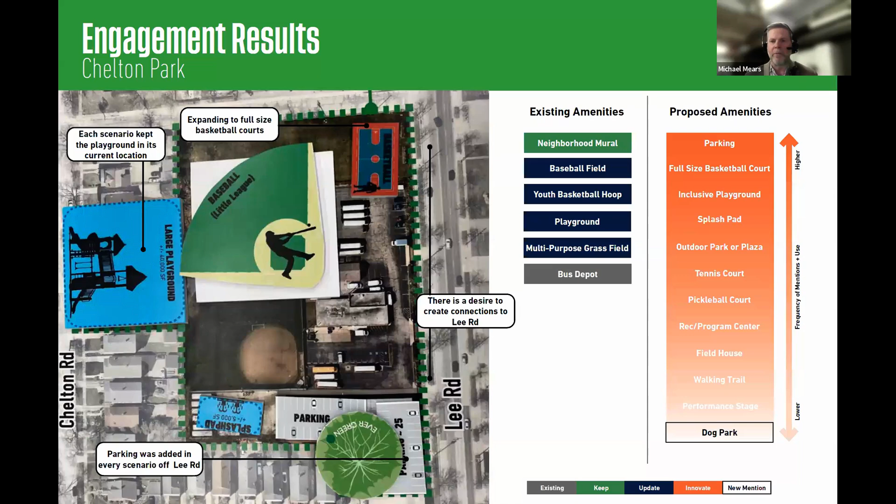Here's a sample of what that looked like for Chelton Park. People looked at maintaining baseball on the site, maybe including a large playground, adding basketball, expanding the parking lot, and things like that. We've taken pictures and documented all these different recommendations to highlight existing amenities people wanted to keep, or proposed amenities people were looking at potentially adding at each site.

For STJ, some of the ideas were converting the existing field to a multi-purpose turf field, maybe keeping the playground or moving the playground, or potentially adding an outdoor program or recreation center on the corner of Lee Road.

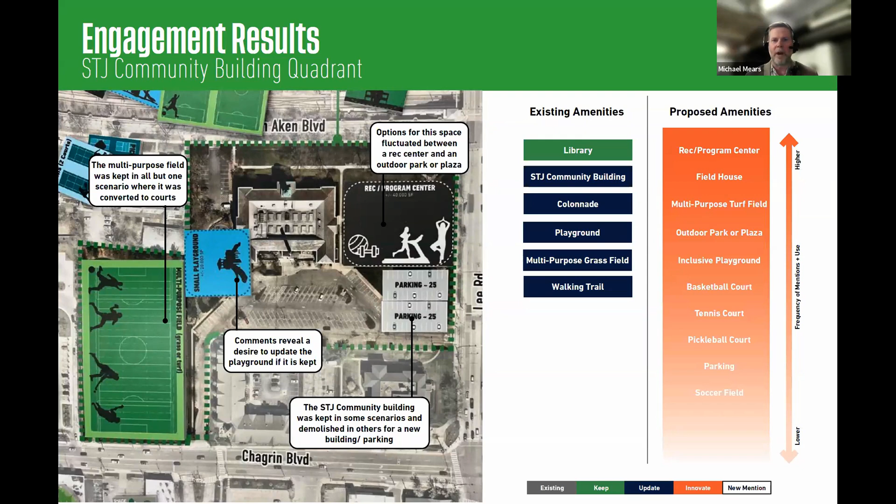So that's what we did throughout the summer as part of our engagement, to build this community vision as we lead to plan creation and start to think about our strategic planning and design concepts for each site. Now I'm going to quickly, at a high level, run through each of these sites and what we've done to take that information and those exercises to create site plans and visions for each one.

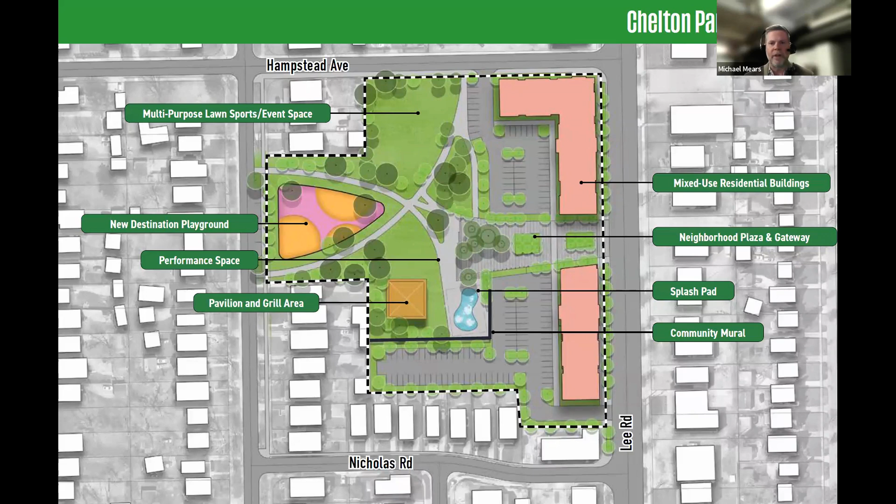In the second option for Chelton, we've done similar to what the first option suggested, maintaining that street wall and that sort of urban edge along Lee Road, really trying to activate that street with mixed-use buildings. Again, providing that opening in the neighborhood plaza and gateway for a variety of different uses and activations, letting the buildings spill out into the park and into the space.

Here, what we've tried to do is minimize the impact of parking on the site as much as possible, and really try to tuck it under the buildings as much as we can.

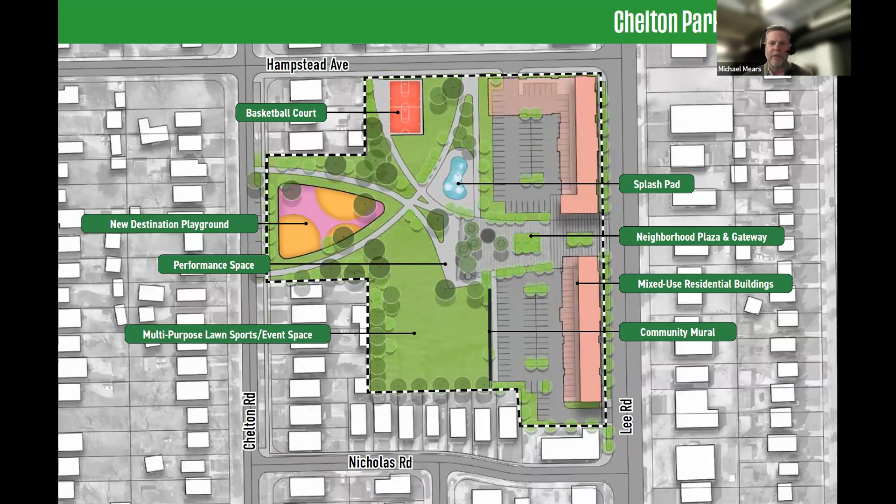That way we can open up as much park and recreation space to the west of those buildings as possible, really maximizing the multi-purpose lawn space for events or for other games and practices, but also including the destination playground, the splash pad, and in this option, an additional basketball court, as some of the items we heard from residents they would like to see in this sort of neighborhood scale park just outside the Moreland neighborhood.

So with that, you can see option 1 and option 2 side by side. As part of this presentation, to try to make this as interactive as possible, we're going to have a poll here to let you provide some feedback and let us know which one of these two options really you get excited about and which one you would prefer.

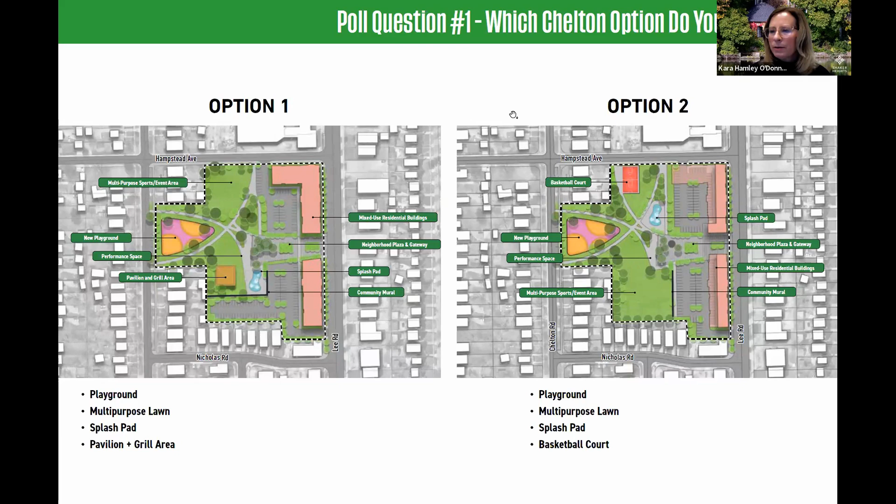So now we're going to move on just north of the Chelton site to the STJ Community Building Quadrant. This is the area in and around the library that includes the colonnade along the corner of Lee and Van Aken, and also the multi-purpose field along Chagrin Boulevard.

We think this area has a lot of existing open space that could be repurposed for recreation. So that was one of the things we really looked at when trying to fit items in and around the buildings that exist on site.

So for STJ option one, again building off some of the recommendations included in the Lee Road Action Plan, we're showing here a two-story recreation center with indoor basketball courts just to the north of the STJ building. This option includes a renovated STJ building. The idea here is to create a sort of indoor recreation center utilizing the existing building, but then building an addition to that building to the north at the corner of Lee and Van Aken to really provide those indoor spaces for seniors and teams and other programming and activities.

Adjacent to that building, we're proposing a new playground between the public library and this new proposed recreation center. In addition, we're also looking at adding a half-court basketball court where the existing playground currently is, and converting the existing soccer field to a regulation-size multi-purpose turf field, really focusing on the idea of having fields and spaces that could be utilized as many days of the year as possible without being impacted by weather or other events.

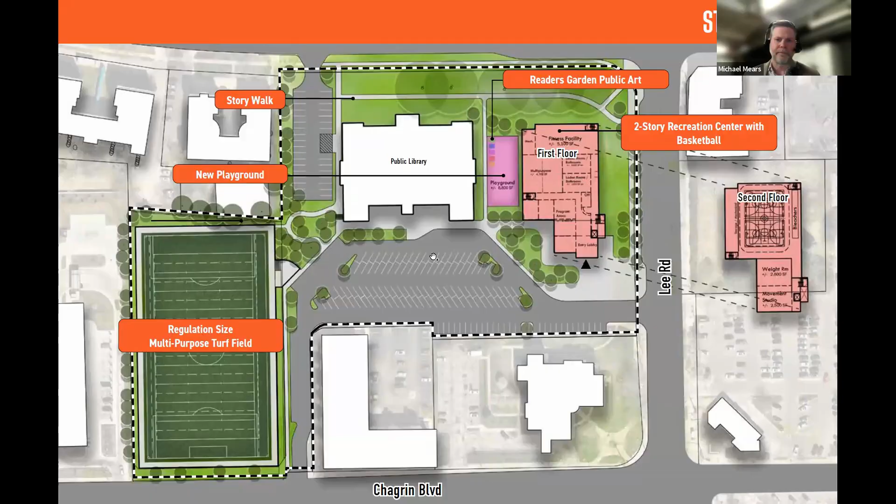So here again, like the first option, you can see option 1 and 2 side by side. The one on the left has a new recreation center but keeps STJ as a renovated building, doing an adaptive reuse of that structure. The option on the right does not keep STJ, but instead builds a brand new two-story recreation center with those indoor facilities from scratch.

So like the first option, we want to take your pulse and give you an opportunity to provide feedback on which of these two options you would prefer.

As a reminder, option 1 includes a half basketball court, and both options include basketball indoors in both of those options.

Some of the differences between these: they're very similar, but the new building provides some more flexibility in site design and layout without having to work around the existing constraints of the STJ building, while the other option provides the opportunity for adaptive reuse of the existing structure, which was the former library.

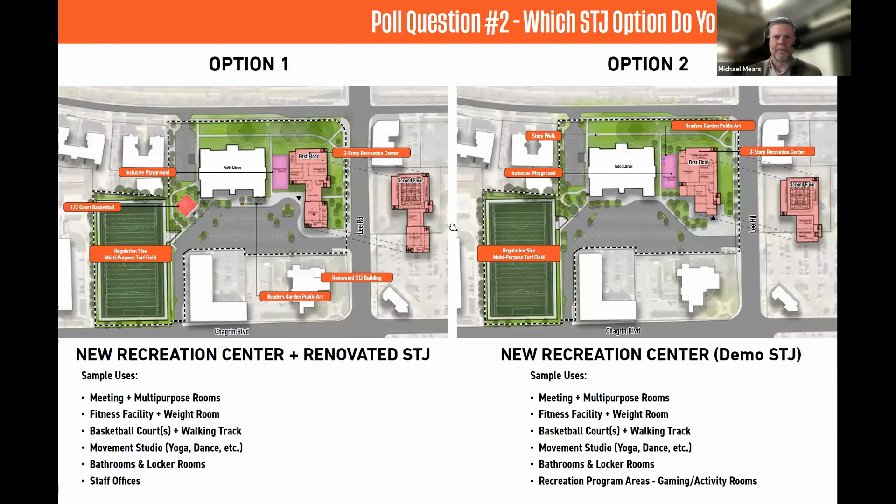Moving on to some of the larger sites, including Thornton Park. Obviously we all know this is one of the key sites in the city of Shaker and has been for a while, including the pool and the ice rink. But we know that the ice rink may require some significant capital investment in the next five years. So really what we're looking at is how can we phase in recommendations that keep a lot of the existing amenities people love at this location, while also providing for the needs of future residents and future members of the Shaker community.

For option 1 for Thornton Park, one of the big first moves is looking at building a new 1.5 sheet ice rink facility where the current existing tennis courts are, in the northeast quadrant of the site. When we say 1.5 sheet ice rink, this means one full-size regulation ice rink and then a small studio rink, a half-size rink or somewhere around there, to provide additional flexibility and options for programming, whether it's learn-to-skate or other events.

The ice rink includes a lot of new features, including a multi-purpose room, new locker rooms, bleachers, concessions, and other locker rooms specifically dedicated to hockey, and then also locker rooms in this option specifically dedicated to the pool.

As part of this option, one of the things we were exploring was the reuse of the existing ice rink building to create an indoor turf or indoor court kind of field house once the new facility would become online. In addition to that, you can see an upgraded outdoor pool facility, using the existing footprint as much as possible to upgrade the existing pool and its facilities.

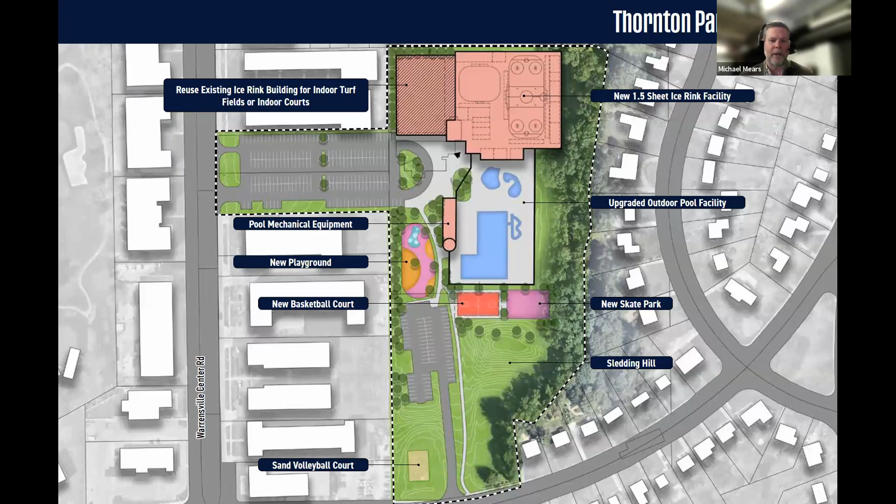In addition, keeping a lot of the same elements that exist on the site, from the sand volleyball court to the sledding hill, and also relocation of a basketball court and a skate park to fit existing amenities that currently take place at Thornton. We've also suggested potentially a new playground with other outdoor water play or splash pad area, so people could participate during those hot fall months when the pool may be closed.

Thornton option 2 also shows the new 1.5 sheet ice rink facility in the same location. But with this option, one of the big moves, in addition to building that new rink, was the suggestion of potentially moving the pool facility to another site in Shaker that we'll touch on later.

In this option, we removed the potential renovation of the existing rink and created an area for new additional courts, or to bring back some of the courts that were currently there where the new rink is being proposed. Moving the pool allows us to reconfigure the parking lot on this site and shift things around a little bit.

You can see we've reconfigured the boundary to include this future development site along Warrensville Center Road. The idea is that we don't necessarily need the parking that exists there. It can shift to the internal site between a proposed new playground and the new ice rink facility. So the idea is, can that future site be opened up to development for long-term opportunities in and around the Van Aken district and along Warrensville Center Road.

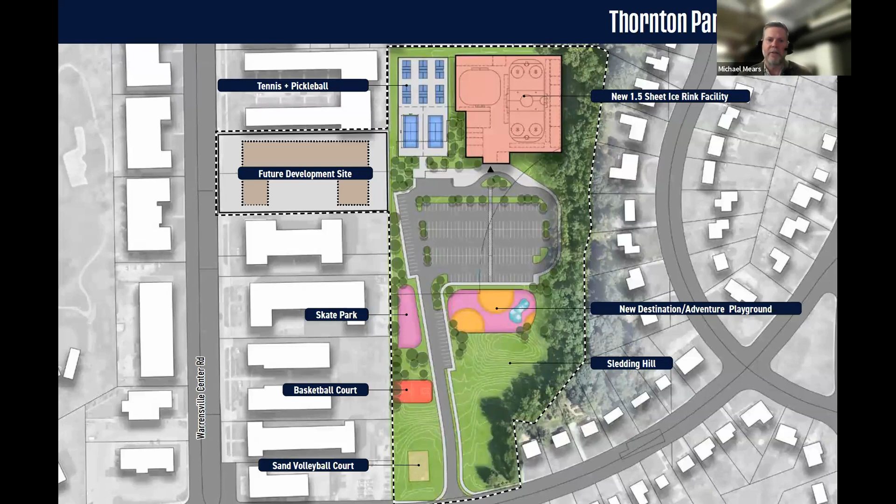So you can see here the two side by side. Both include the 1.5 sheet ice rink facility in that northeastern corner. The rest of the amenities are spread out differently between the two, with the option on the left exploring reusing the existing rink, whereas the one on the right explores bringing back those courts and moving the pool to the middle school site to open up potential for future development between the residential towers along Warrensville Road.

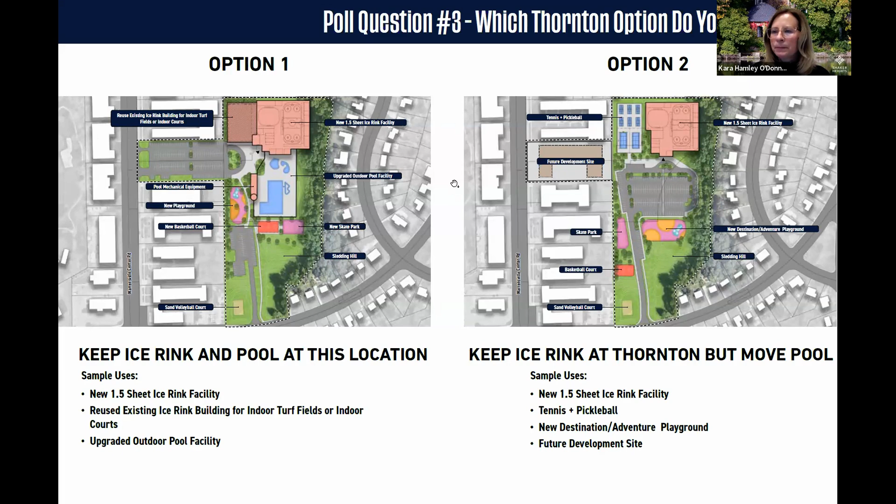Here we're going to touch on the Shaker Heights Middle School, the largest of all the sites at 33 acres. We know that this school site is being utilized as the current middle school, and then eventually will be utilized by all the elementary schools as a transition space as the school facilities plan is underway and gets implemented over the next couple of years. So the key element here is, although it's the biggest site and provides a lot of opportunities, this main site may not be available for 10 or more years, so we need to think about when and how some of these recommendations could take place or be implemented.

So the first option, corresponding with the recommendations you saw at Thornton, focuses on outdoor recreation, keeping the pool and rink where they currently stand, and adding additional recreation amenities at this site. Starting to the east along West Belvoir Oval, we've discussed keeping the fields as they currently stand - the football field, the two baseball fields, and the field hockey field on the corner - keeping those as is, renovating them as needed, but utilizing those as they currently stand.

Moving to the west, one of the things we suggested, again looking to maximize the ability to play sports year round in a lot of different ways with flexibility, was to remove the existing field and track and replace it with a regulation size multi-purpose turf field that can be utilized by the community for different sporting events and different teams.

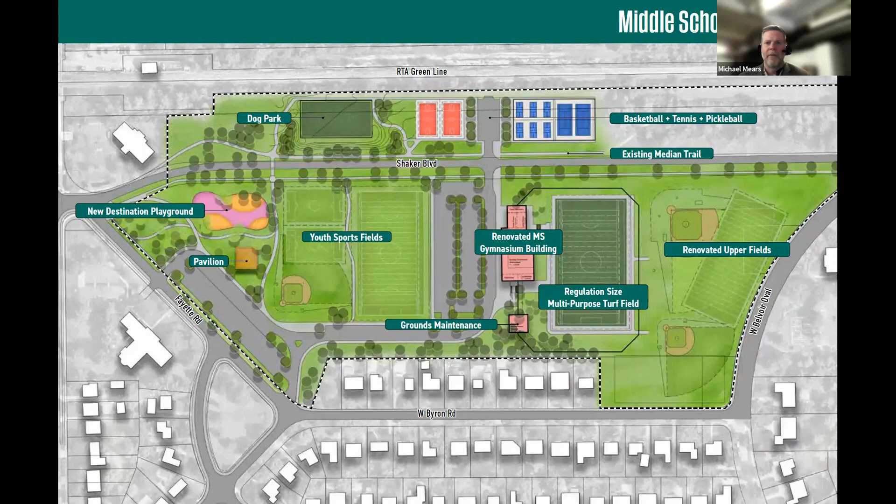As part of this site, we've also looked at the area north of Shaker Boulevard, where the existing median trail currently resides and where some of the existing soccer fields reside. So we've looked at the opportunity to add a dog park along the RTA Green Line tracks, in addition to additional courts, including basketball, tennis, and pickleball, where the current existing median fields and soccer fields reside.

The second option for the middle school, similar to the first option, keeps a lot of those amenities north of Shaker Boulevard, adjacent to the median trail, the same. So maintaining the location for the dog park, adding additional pickleball, tennis, or basketball in that location as well. And again, this site plan option also maintains the upper fields as they currently stand along West Belvoir Oval to the east.

Here, what we've done is also look at the opportunity of maximizing turf field options, building both an upper field where the current turf or track resides, and then also a lower turf field where the existing middle school gym currently resides.

Moving to the west, reconfiguring that layout, instead of having additional fields and a destination playground, this option coincides with the Thornton Park option 2, and really focuses on whether we move the pool facility here, pair that with a large recreation center, so have this sort of indoor and outdoor aquatics tied into a large recreation center that we see in a lot of other communities doing a similar thing.

As part of this, one of the things we've also looked at is trying to create this sort of campus environment, utilizing the rec center and the Bertram Woods Library as one community space. So one of the things we've explored is the opportunity to close Fayette Road from through traffic to Warrensville Road, still maintaining one-way access in and to the site from Shaker Boulevard for those traveling from the west, but not having the signalized intersection at that corner of Fayette to get you access onto Warrensville Center Road.

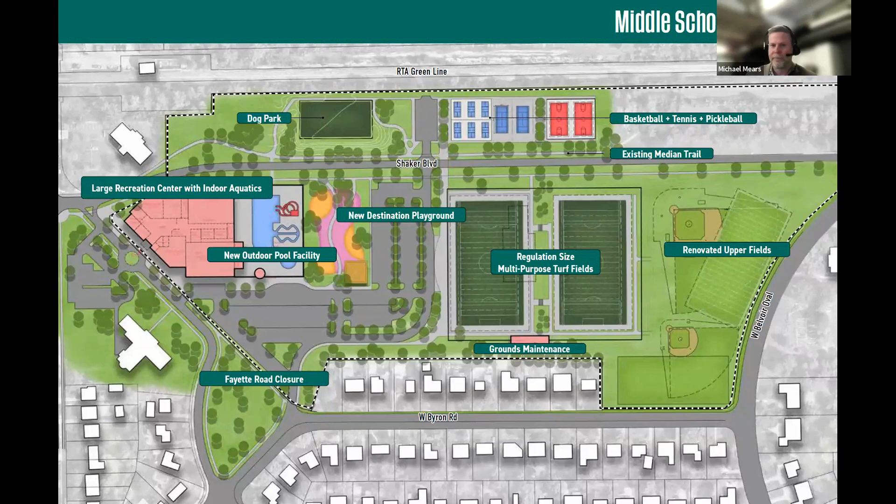So here you can see the two options side by side. The option on the left really focuses on outdoor recreation with a renovated middle school gymnasium building as that central hub to provide some of those additional facilities, like public restrooms, for all the different activation and events that could be happening there during the day.

And then the option on the right explores this idea of creating a large recreation center with a potential indoor-outdoor pool facility as part of that, utilizing the western edge of the site to create a campus that's really accessible for visitors from Warrensville Road and the RTA transit station there on the Green Line.

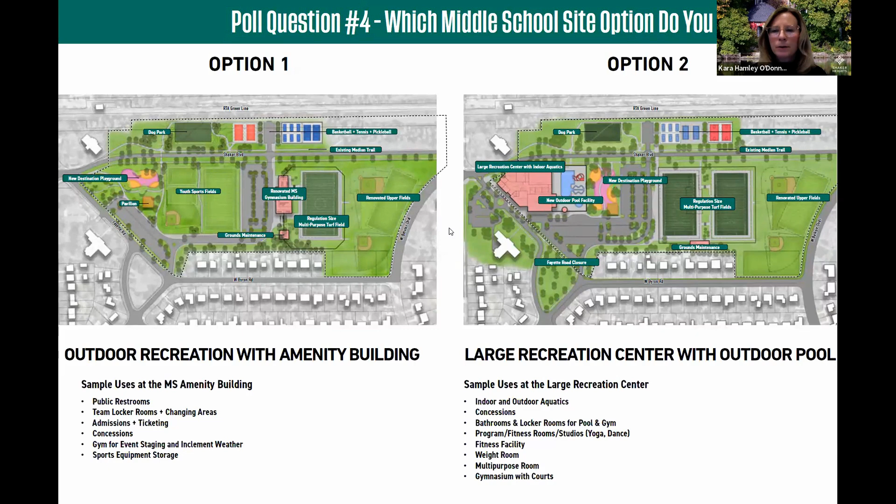The last site I'm going to touch on really quickly here before we wrap up is Hildana Park. Based on the community feedback, as I mentioned, that we gathered through the process, we also wanted to take a look at recommendations to Hildana Park.

It's a small park along Chagrin Boulevard. If you don't know it, it's almost just across the street from the soccer field and the library, but provides a great opportunity for additional neighborhood amenities for the Moreland neighborhood, and we really wanted to take a look at how this site fits in with some of the other park recommendations as part of this plan.

One of the key elements happening here is the city is working to develop new public art that reflects the Moreland neighborhood, updating recommendations and existing facilities at Hildana. We're also looking at where that new public art could be located—still being determined—but there are opportunities to create multiple public art locations, whether in the existing plaza or scattered around the site.

Other recommendations include a new loop trail to connect existing trails for a nice walkable experience, adding new trees and landscaping to shield the plaza and activity space from Chagrin Boulevard, upgrading and resurfacing existing pathways, and providing new benches and seating and picnic areas for people to gather, corresponding with the Little Free Library and other exciting things happening at Hildana Park.

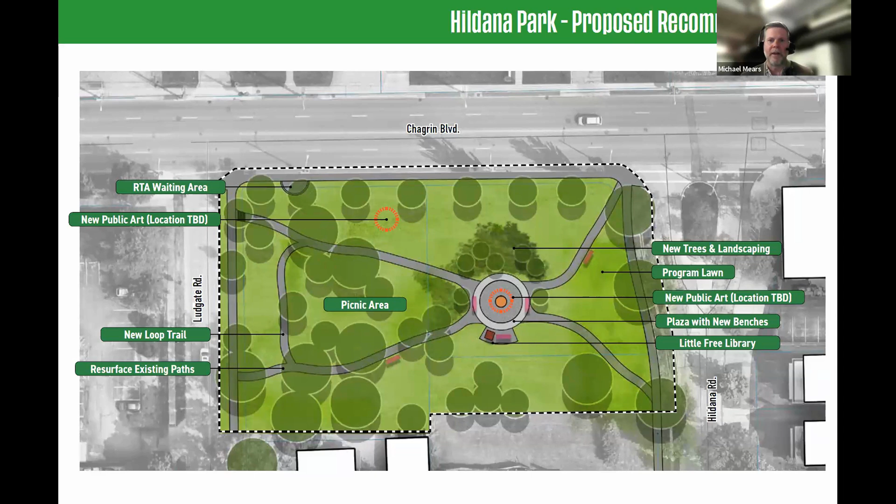That wraps up the quick breakdown of these sites. As mentioned multiple times, we're having an in-person meeting on Wednesday that will allow you to get into more detail and view these site plans in person on big boards in and around the room, giving you the opportunity to review the design concepts for each site and ask us additional questions. We really hope you join us Wednesday at the Stephanie Tubbs Jones building.

One of the things we'll do at this meeting is allow you to vote again on your preferred option, and also leave additional comments and feedback. We're also trying to make these meetings as active as possible, so we're going to create a prioritization activity to allow visitors and attendees to show us how they would spend funds on some of the suggested recreation improvements you've seen here across these four or five sites throughout the city of Shaker.

So what's next after that public meeting on Wednesday? We will share a citywide questionnaire to help prioritize some of the needs and suggestions based on what people feel is important. We will refine and finalize our recommendations based on the feedback given here today, from our project team and advisory group, and the feedback we expect to receive Wednesday at the public meeting.